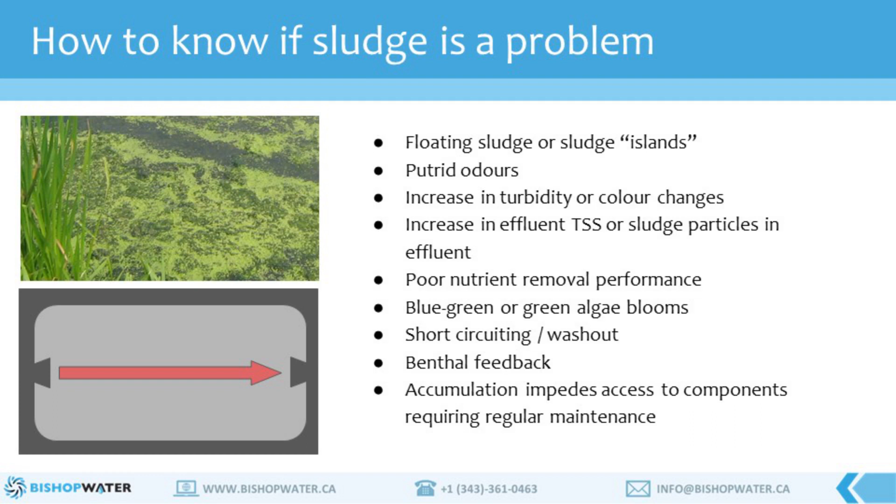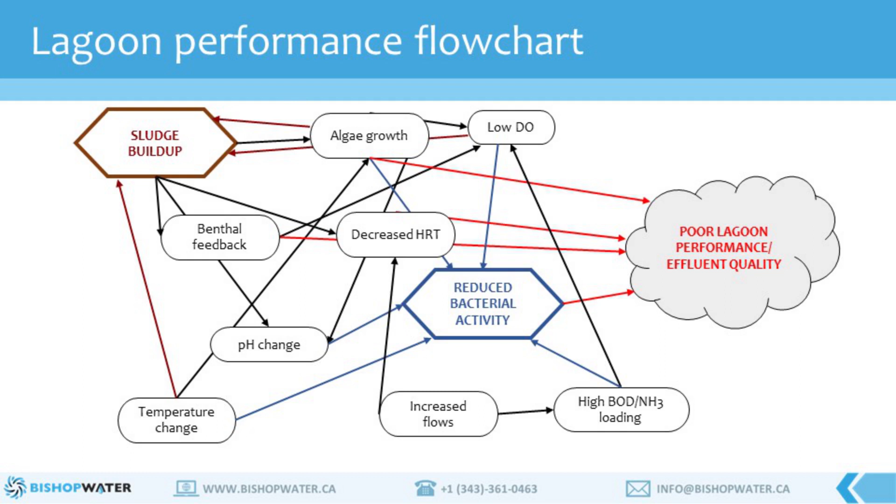Once excessive sludge is identified as the cause of a lagoon's operational issues, we can begin planning the desludging project. But before we go deeper into that process, I would like to start with a bit of a warning about some of the mishaps that can occur. One of the most important steps is knowing what the desludging project is supposed to achieve, because that helps determine how much sludge should be removed and from what areas of the lagoon. But without a clearly defined objective, it's difficult to scope the project and achieve measurable success.

Underestimating the sludge volume is also at the top of our list for things that we don't want to have happen. If this occurs and there's a lot more sludge in the lagoon than was estimated, it can add significant time, cost, and community disruption to a project.

Inadequate sludge sampling is also a situation that you don't want to find yourself in. The more samples we take, the better we understand the sludge characteristics throughout the sludge blanket. We also use these samples to do dewaterability testing and determine the best polymer for the lagoon. If the polymer or dose rate is suboptimal, then we can see slow dewatering and we may not get the best dewatering performance. That means more trucks will be needed to carry away wetter sludge, which increases costs.

Effluent quality can also be adversely affected. Too much polymer can leave a residual in the effluent, and too little may not sufficiently retain fine particles, leading to high TSS filtrate.

Great care should also be taken to understand the contaminants that are in the sludge, such as metals. These contaminants greatly influence the disposal or repurposing options for the sludge. It's best to know about these before the sludge comes out of the lagoon, so you can explore disposal options and ensure you have a plan and budget to carry out the disposal.

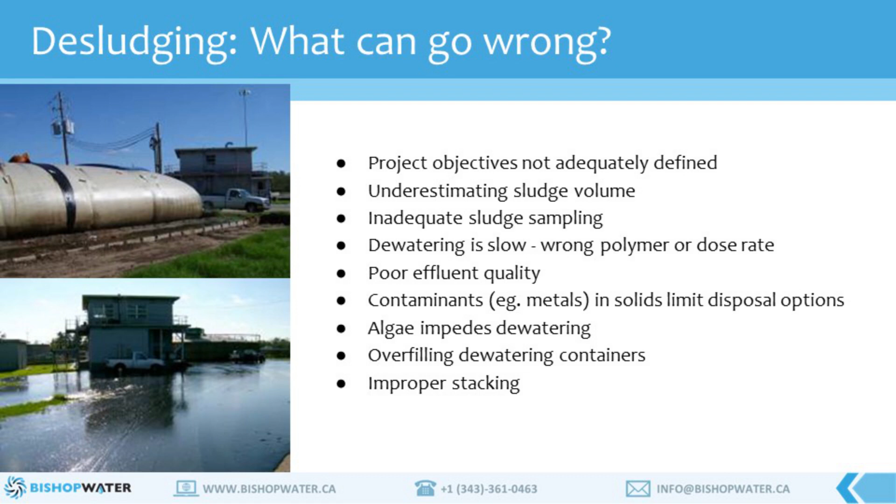Now we know what to watch out for, let's talk about how to do it right. Desludging begins with a comprehensive assessment of the lagoon or lagoons. Sludge usually accumulates unevenly in a lagoon, with heavier materials like grit settling near the inlet and lighter materials being dispersed farther and accumulating based on flow patterns, wind, and aeration.

The image on the top left is a sludge map of a lagoon showing high accumulations in the red area and moderate accumulations in the yellow. We take samples at predetermined points to estimate the sludge volume and the available treatment volume. The number of samples are based on the size of the lagoon and the sludge features. And of course, more sampling is better to understand the sludge profile and make good calculations.

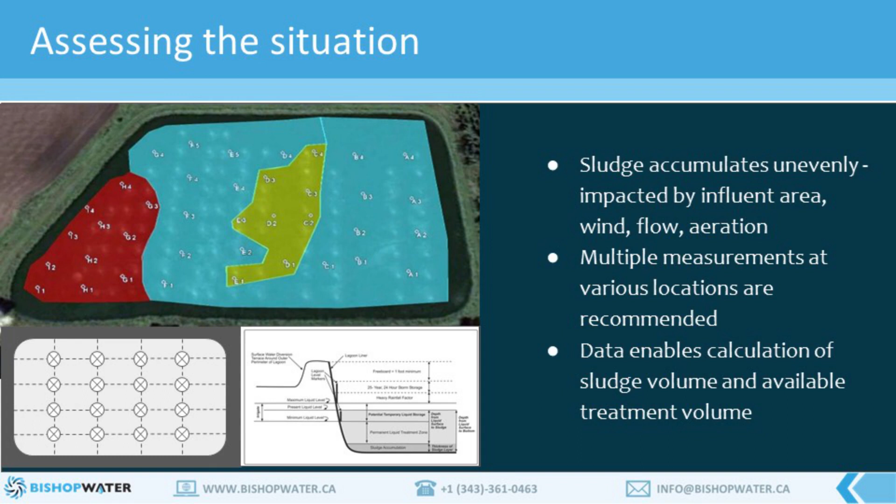There are several ways to measure sludge volume, ranging from very simple to very sophisticated. One of the easiest and most common ways to do it is with a sludge judge, shown top left. That's just a PVC pipe with a flap foot valve that the operator lowers down into the sludge layer from a boat. This is a good system because it takes depth measurement and a core sample at the same time. But once the solids concentration is above 5%, it becomes more difficult to push the tube down into the sludge.

A sludge gun is also a great system that can be used in combination with the sludge judge, shown bottom left. This electronic device uses infrared light to detect the sludge bed. The sensor is calibrated to ignore suspended solids and sounds a tone when it reaches a sludge of a certain density. The user reads marks on a string to determine the sludge depth.

And a third method that is commonly used is a bathymetric survey. This sonar mapping system is usually mounted on a small GPS-controlled boat that maps the entire lagoon in a grid pattern. It's the most accurate way to create a sludge map. The bottom right image shows the details we get from this technology.

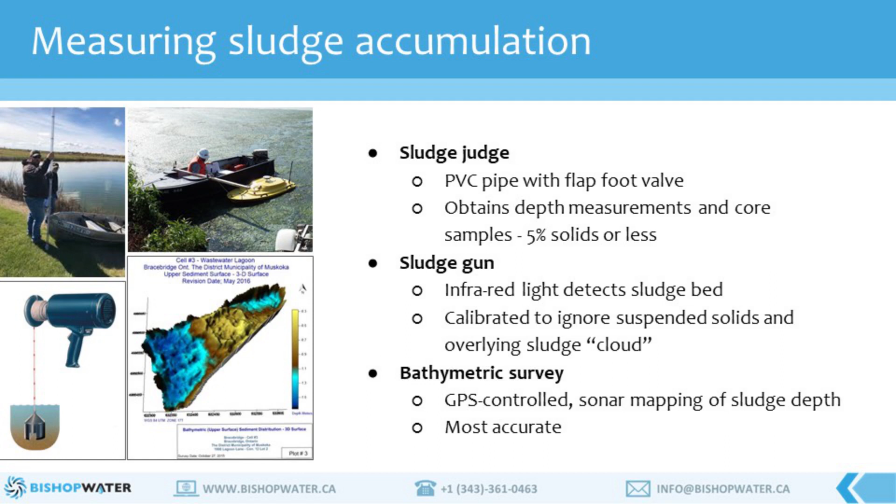It's also really important to have good as-built drawings of the lagoon. With those drawings, we can overlay the survey data with the lagoon profile to very accurately calculate the sludge depth and volume.

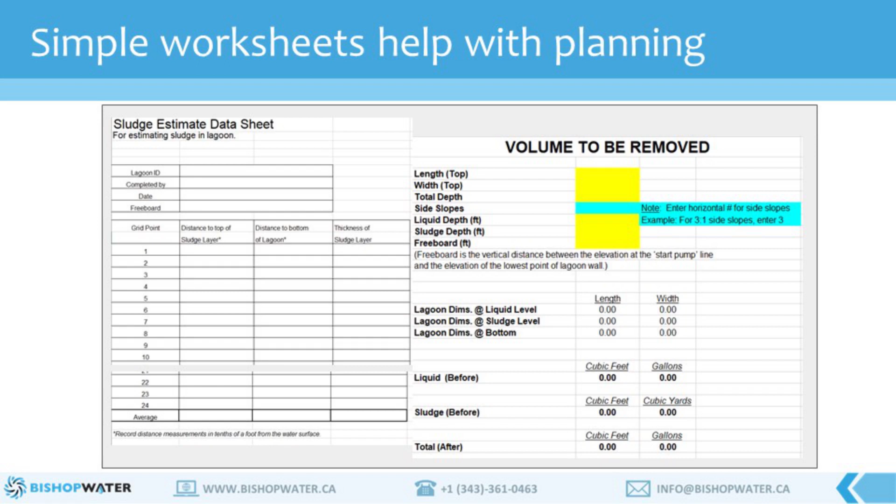This worksheet is an example of how data from the sludge judge or sludge gun would be recorded. This part isn't complicated, but it's only as good as the amount of data that is collected for it. The more data points we have, the better our sludge map and sludge estimate.

As we mentioned earlier, sludge samples are critical. They're often collected as the survey is being done. This is so important because sludge density or percent solids can vary considerably throughout the lagoon. Lagoons that have well-aged mature sludge and maybe haven't been cleaned for 20 years might have very dense sludge. The amount of grit and volatile organics can also influence density.

We've seen swings that range from 3 to 5% in one area of a lagoon to more than 40% in other areas. If you miss that dense area in your survey and don't account for it in the estimate of sludge volume, you will be surprised to see a lot more sludge coming out of the lagoon than you planned for.

When we do our testing, we ask for a 20-litre pail of sludge with samples that have been collected from multiple points in the lagoon. Large lagoons may require more than one pail. We combine the samples to create an average sludge mix and do our testing on that.

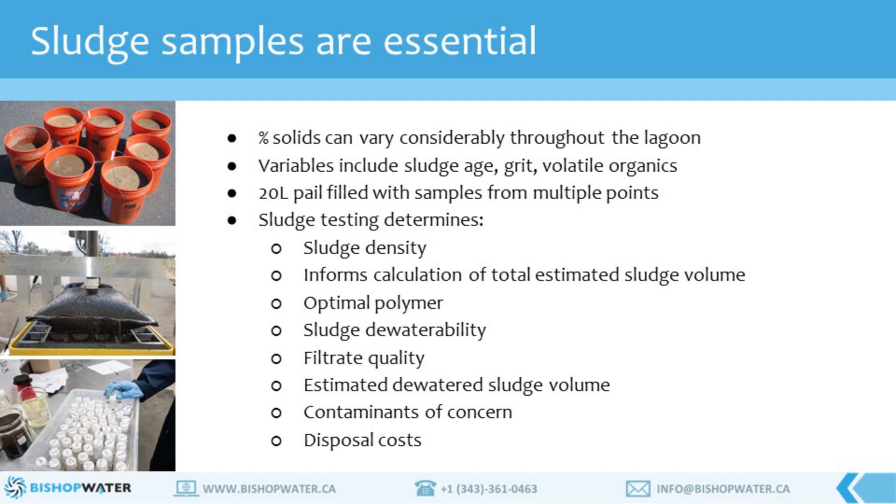With that sample and the sludge survey, we can now determine everything shown in the list: sludge density, total estimated sludge volume, optimal polymer, sludge dewaterability, filtrate quality, estimated dewatered sludge volume, contaminants of concern, and disposal costs.

Once we've determined how much sludge is in the lagoon, we can think about how much to take out. There are a number of factors that can be considered at this point. First, what is the purpose of the desludging project?

Many lagoon sites opt to do everything in one shot. Maybe it's been 15 or 20 years since the last desludging, and they just want to get it done and not worry about it until another 20 years goes by.

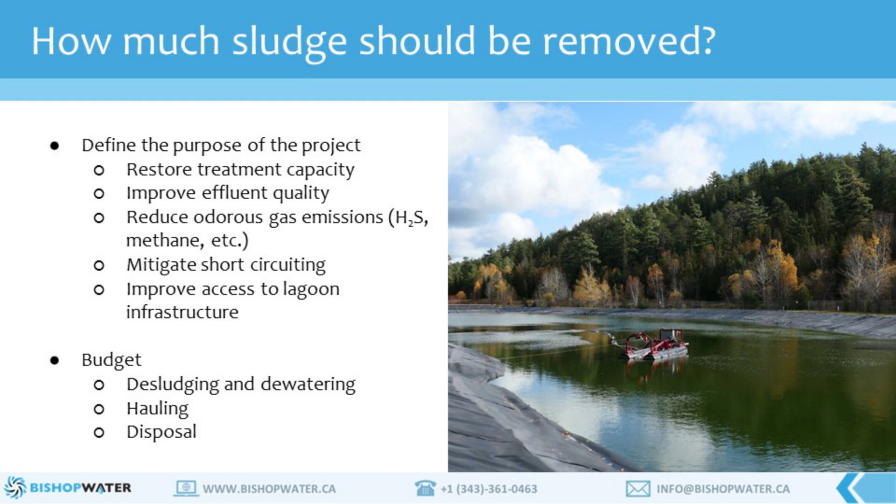But there's another option, which is a partial lagoon desludging. This can achieve some or all of the objectives shown on the last slide, and also provide some budgeting and operational flexibility. One of the biggest benefits is that it can defer the cost of a full lagoon cleanout over several years instead of a larger one-time expense.

We have performed several partial cleanouts with our Bishop Solids Management solution that is based on passive geotube dewatering. What we typically do is size the bags to provide 2 or 3 years of capacity so they can remain on site, continue dewatering, and enable the client to avoid hauling and disposal costs.

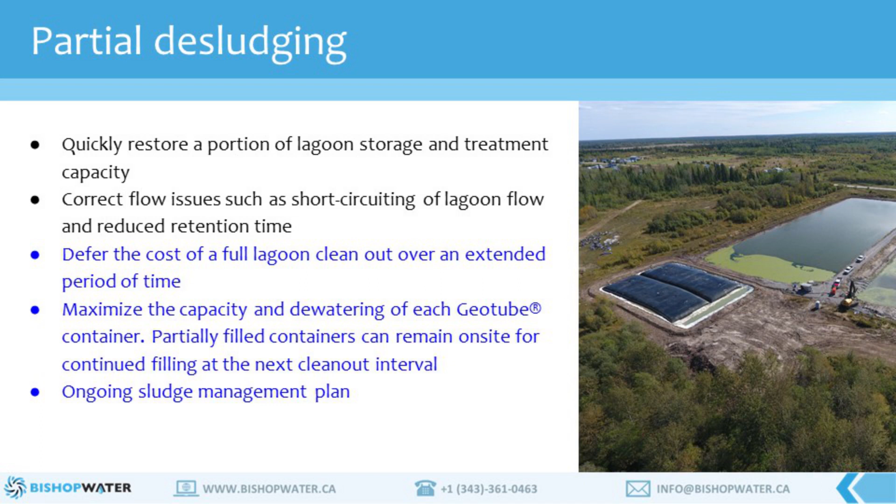We return to these sites on an annual basis to continue the cleanout and add materials to the geotubes. Another advantage is that the annual sludge management plan is continually restoring treatment capacity and reducing the risk of poor performance caused by sludge accumulation.

Here's an example of a partial lagoon cleanout project. In 2011, we removed about 250 bone-dry metric tons of sludge from lagoons near Cornwall, Ontario. These went into 4 large geotube containers that remained on the site.

In 2012 and 2013, we returned and continued pumping into those bags. Each time they were left at the site to continue dewatering. They also froze over the winter, which significantly enhances the dewatering process. The original geotubes are no longer at site, but we still go back to remove sludge as part of a maintenance strategy.

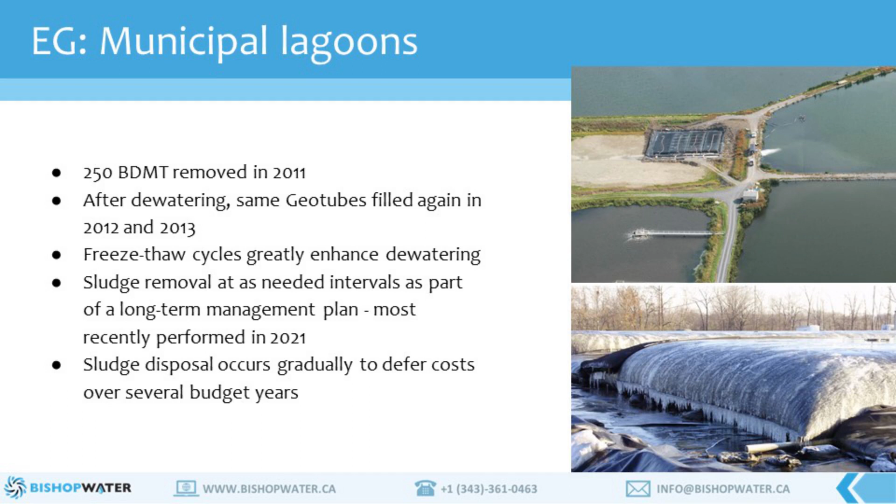Going back to our planning process, the next step is sludge removal from the lagoon. There are 2 options, each with distinctive cases and benefits.

First is a hydraulic dredge that uses an auger to gather sludge and pump it out of the lagoon. One big advantage of this is that the lagoon can often remain in operation while the dredging and desludging is done. The aeration equipment and other submerged equipment can remain in place, and there is little risk of damage to the liner. There are many types and sizes of dredges, even automated ones that use GPS controls to desludge the lagoon.

The second option is pushing the sludge with tracked equipment to a pump that is set up in the lagoon. This can be a more cost-effective approach for a total cleanout and offers greater efficiency since the sludge is visible and can be easily scraped up.

One downside, however, is the lagoon must be decommissioned and drained, and if it's an aerated lagoon, then the aeration equipment must also be removed. I should also mention that there is a risk of damage to lagoon liners with this method.

Some jurisdictions, such as Prince Edward Island, don't allow tracked equipment to enter a lagoon to ensure that no damage to the liner will occur. It's important to know if there are restrictions in your area when planning the project.

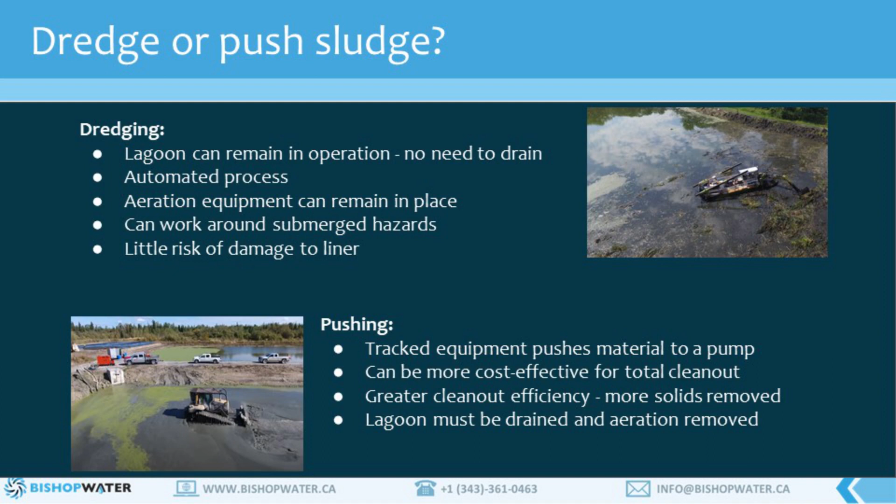There are a few options to consider for dewatering the sludge too. Sometimes sites choose not to dewater sludge, and we have seen projects where liquid sludge is immediately hauled away for land application. This method does rely heavily on trucking, and it can become costly, even more so if the land where the sludge is being applied isn't close by.

Let's quickly have a look at some other dewatering options. Mechanical options include centrifuges and belt presses. These can provide automated operation and can reduce sludge weight by 90% or more. There are many mobile options that are quite compact, which makes them ideal for sites with space constraints.

However, mechanical dewatering systems are quite energy intensive to operate and have a limited rate at which they can accept sludge, usually only a few hundred liters per minute. Dewatered solids are often collected in bins and hauled away regularly.

Another option is passive dewatering, such as our Bishop Solids Management solution, which we introduced when we talked about partial cleanouts. This is a gravity-based process that uses far less energy than mechanical systems. Since the solids are collected and contained in the geotube, it enables the solids to remain on site for an extended period. It does require more space than mechanical options, but the geotubes are customizable to fit the available space and can be stacked to further reduce the size of the dewatering cell. One other important advantage is that this process can accept solids as fast as they can be pumped, whether it's 2,000 or 10,000 liters per minute.

At this point, I'll turn the presentation over to Tyler.

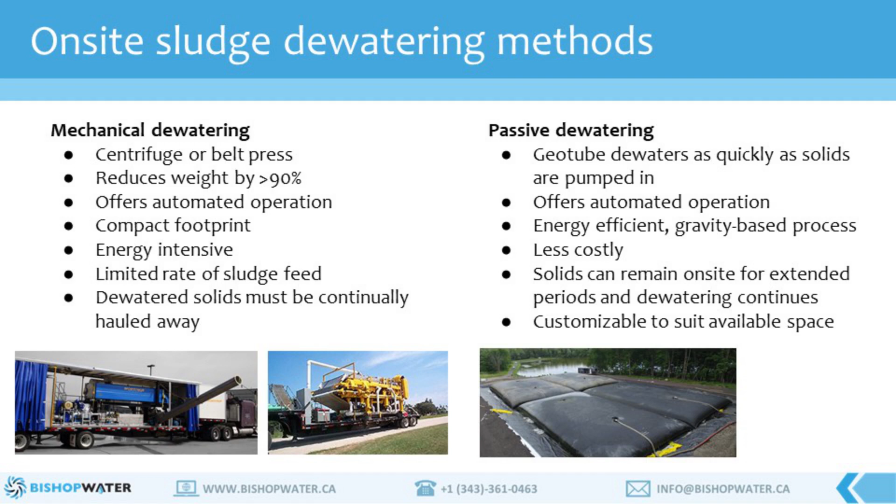Thanks, Kevin. Before we continue, I want to say a bit more about the Bishop Solids Management solution and its application for lagoon desludging. We've used this process for more than a decade at sites throughout Canada. It's a complete customizable solution that includes sludge removal, sludge conditioning, dewatering, and containment.

As Kevin said in the previous slide, it's very energy efficient with automated polymer dosing and flow controls that make it very easy to use. Unlike centrifuges and belt presses, our process incorporates very few moving parts, which makes it inherently reliable. We can achieve high levels of dry solids using only geotube filtration, specially selected dewatering polymers, and gravity.

Although we're talking about lagoon sludge today, this system is very effective for virtually any organic or granular slurry material, so it can be used for storm ponds, freshwater sediments, or mine tailings, to name a few other common applications. In addition to dewatering, optimized chemical conditioning also enables it to retain and reduce contaminants such as BOD, TSS, phosphorus, nitrogen, and metals, improving the quality of the filtrate.

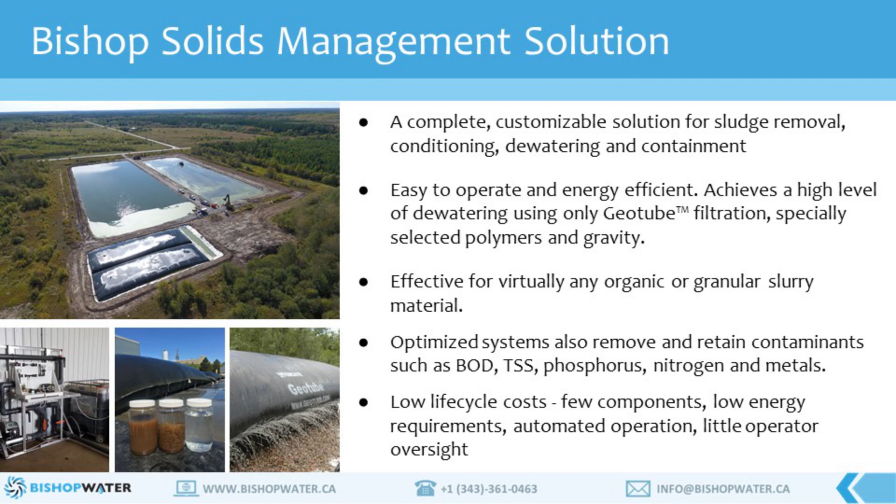Very quickly, here's how it works. Slurried solids are removed from the lagoon and pumped into the geotube. As they are pumped, our VPAS non-mechanical polymer system mixes and activates polymer in a single step, then injects it directly into the sludge feed line. Polymer accelerates dewatering and also helps retain fine particles and contaminants within the geotube.

Dewatering begins as soon as the solids enter the geotube, and we can immediately see a large volume of water permeating through the pores of the container. Once the bag is full or the desired amount of sludge has been processed, we disconnect the hoses and dewatering continues.

The longer the solids remain in the container, the more water is removed. The freeze-thaw cycle also enhances dewatering as frost creates void spaces in the material, allowing for better water movement. The bag can be cut open at any time after dewatering, and the solids can be removed for disposal or land applied if suitable. After several weeks or months of consolidation, the dewatered solids are more like soil than the sludge that was originally pumped in.

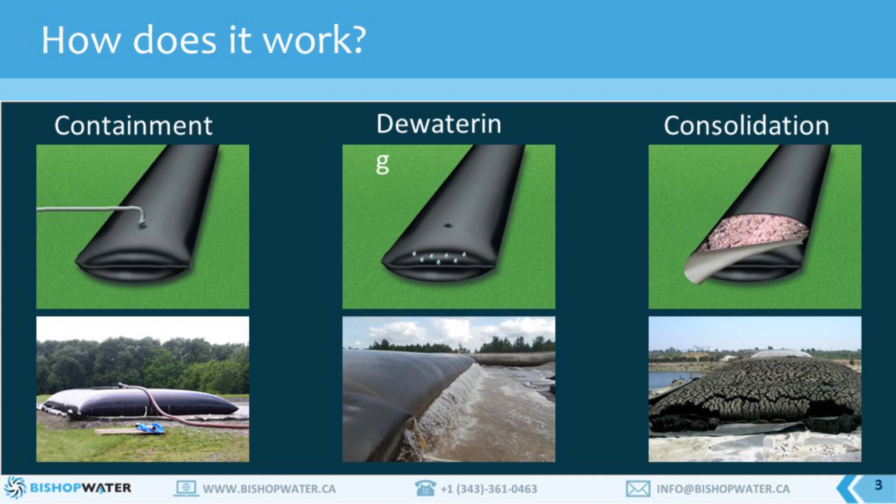We have received several industry awards for our work with this system. Our first was for a permanent system at the Greenway Wastewater Treatment Facility in London. The Bishop Solids Management Solution is used to collect incinerated sludge fly ash that was previously stored in an on-site lagoon. This process of containing and dewatering the solids completely eliminates the need for the lagoon and greatly reduces the hauling and disposal costs associated with removing the solids from the site.

The next project is at the Eganville Wastewater Treatment Plant, where our solids management solution is used to collect and dewater septage from local haulers. The biosolids are pumped directly into geotube containers, and the high-strength filtrate is directed to the adjacent wastewater treatment plant for treatment. Once dewatered and stabilized, the biosolids are used for land application.

Another award-winning project is in Perth, Ontario, where the system collects and dewaters process residuals from the town's water treatment plant. The filtrate from the geotube is of such high quality that it is discharged directly to the Tay River without any further treatment. The system also saved over $6 million in capital costs for the town, which was considering building a mechanical plant to deal with the solids.

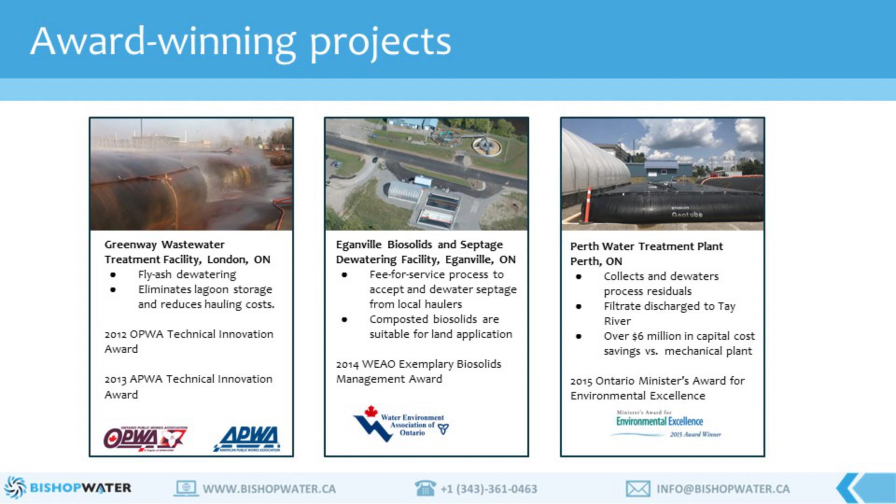Here are a few more examples of some challenging applications we've been involved with using our Bishop Solids Management Solution and geotube containers: permanent systems to handle waste sludge from municipal wastewater treatment plants, collection and dewatering of contaminated sediment and soils at industrial sites, dredging and dewatering of solids from stormwater ponds, collection and dewatering of excess soils at construction sites, on-site systems to collect, process waste, and treat wash water at agricultural sites, and shoreline systems to protect valuable coastal areas from erosion.

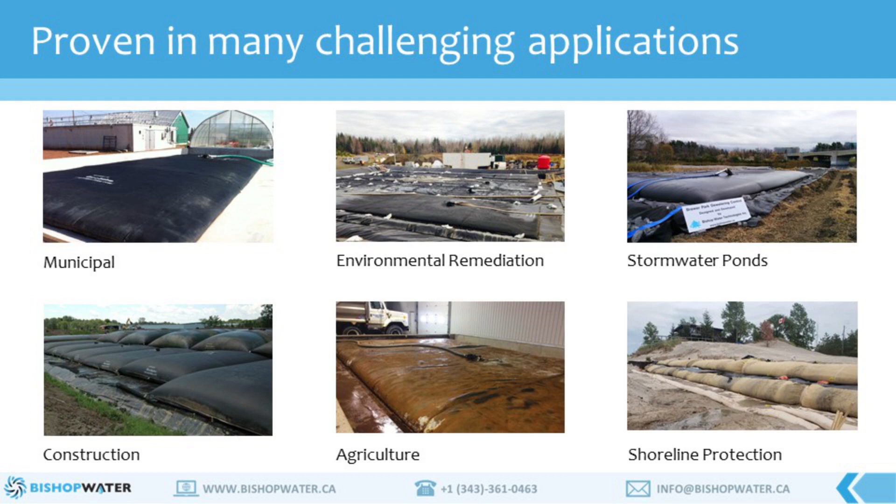Turning back to our lagoon desludging discussion, let's look at how we use the data from earlier steps to make some calculations. Our team uses customized electronic geotube planning tools that use input data such as sludge volume, solids content, pumping rates, and anticipated dewatering performance to accurately calculate the dewatered sludge volume and weight, the size and quantity of geotube containers, the required footprint of the laydown area, and the duration of the cleanout project. These tools are continually updated by TenCate, the geotube manufacturer, to refine the process and improve accuracy.

Regardless of which dewatering method you choose for your project, be sure the vendor can provide highly accurate estimates based on the data you've collected in earlier stages, and that they leverage their operational experience with their process. Don't accept ballpark estimates or ranges of potential outcomes, because errors can set off a cascade of problems that add considerable time and cost to the project.

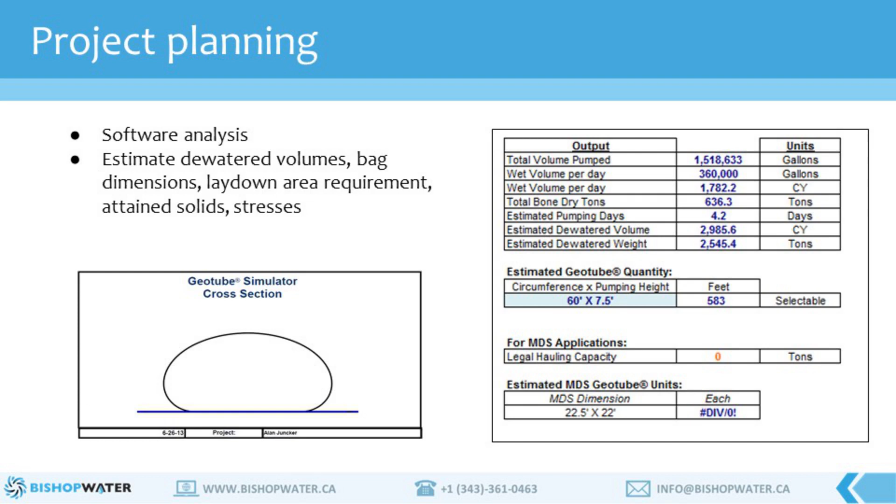Here are a few other important considerations as you prepare for the desludging project. Experience plays a critical role in identifying these planning considerations and determining the best methods for the site setup. Is there sufficient space for equipment and a dewatering pad within appropriate proximity to the lagoons? How will the piping, hoses, and valves be laid out at the site?

Where will chemical injection and sampling points be located? Where will the filtrate go? This is especially important if your lagoon will be shut down. If there's a second lagoon, it could go there, but what if there isn't a second lagoon cell? A temporary secondary treatment containment process may be needed.

It's also possible that filtrate might be good enough to be discharged to a receiving body, but in either case, effluent monitoring will be required to ensure discharge compliance. Keep in mind that even if your filtrate is going back into a lagoon, it may be necessary to track volumes and monitor the filtrate quality.

Schedule your cleanout when nothing else is happening that could be disruptive. This includes other maintenance or construction activities at the plant or lagoon site, and events that could cause large inflows into the plant—things like local industries that increase discharge at certain times of year, community events, or seasonal periods with higher precipitation.

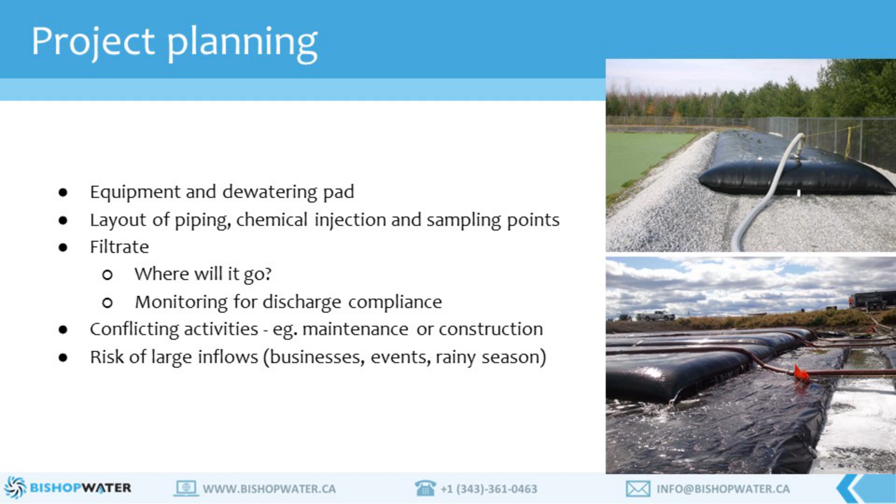Finally, we need to think about what will happen to the sludge that's been removed. Depending on how the sludge is stored at the site, local regulations may dictate how long solids can remain at the site once removed from the lagoon.

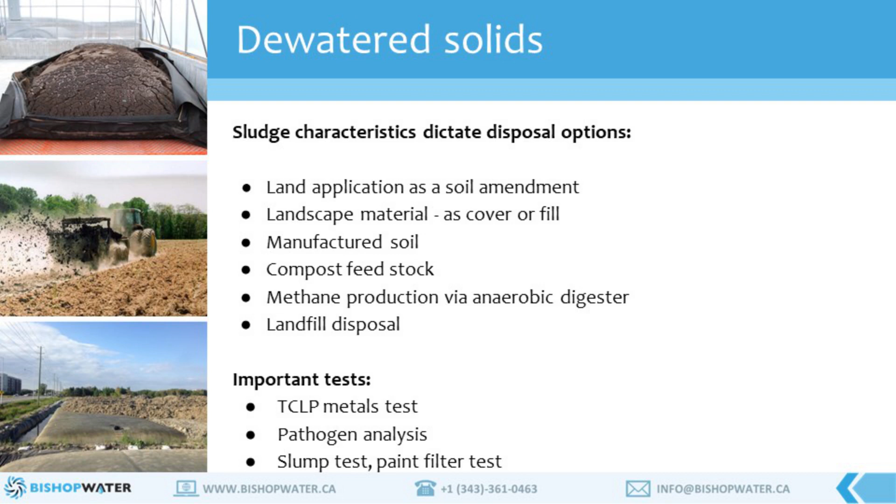There are a number of options for the sludge, including land application, landscape material, landfill disposal, or others. The fate depends on the classification of your sludge into categories set out regionally through applicable regulations, such as Class A, Class B, hazardous material. These classifications are determined by results of analytical testing, and the criteria to compare against can vary by region. We regularly encounter TCLP metals testing, pathogen analysis, and slump testing.

As we saw at the beginning of this presentation, sludge collection and dewatering isn't a DIY job, so some specialized and experienced help is required. There are at least a couple of ways to think about how to structure your project for procurement. One way is to break it up into two parts.

The first part can focus on information gathering, and a company can be hired to do all the sludge measurement, testing, and calculations. Once that information is in hand, it can be used to develop a comprehensive scope of work for the desludging project, and an RFP can be passed on to the service providers for a competitive or sole source procurement.

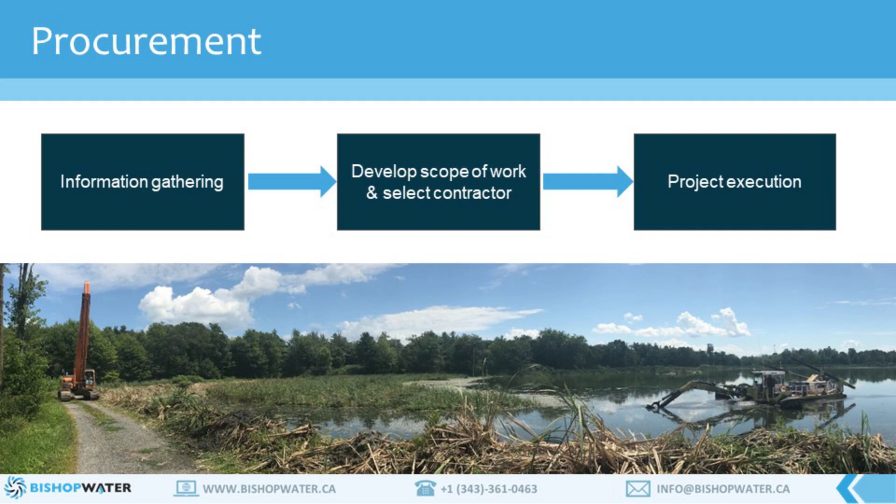The other option is to hire a single company to do everything, perhaps under a consulting arrangement where they handle all aspects of the project. The project lead might use their own resources or hire subcontractors to handle various aspects of the project, but whatever they choose to do, the client deals with a single point of accountability.

To develop the specification for a lagoon cleanout project, reference all of the steps and objectives we've talked about in this webinar. The specification should include a clear breakdown of each of those at each stage of the project. Some of the most important points to include are the volume of sludge that needs to be removed, the solids content of the in situ sludge and dewatered sludge, specific details about the materials and equipment that will be used for the project, and how the dewatered sludge and filtrate will be managed.

Of course, we all know that some of this information can't be accurately determined unless comprehensive testing has been done. So if one company is hired to do everything, they should present their plan and methodology for information gathering as well as the desludging. But if the procurement is broken up into two parts, two specifications will be needed: one for the information gathering stage and one for the sludge removal and dewatering.

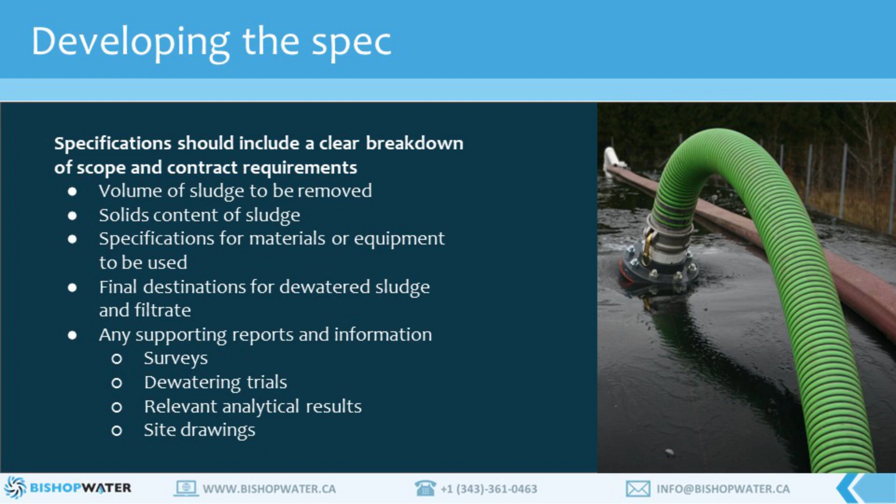Whether there are one or two components to the project, as much supporting information as is available should also be provided. That can include things like previous surveys, dewatering trials, analytical results, and site drawings.

Once an RFP is issued, vendors will have access to the specification and supporting documents. But for some, that won't be enough, and they'll want to contact you to ask questions and gather more information. Collecting that information takes time, so make sure sufficient time has been allocated for potential partners to visit the site and conduct the tests needed to make good project estimates.

You should also be prepared to provide information such as site drawings and utilities like piping, aeration, and electricity. Aeration systems and other obstacles on land or in the lagoon also have a big impact on how desludging is approached.

So be ready to talk about your plans for those infrastructure assets and how they can be worked around. Management of the filtrate and dewatered sludge are also big parts of a desludging project and need to be addressed in the proposal. Vendors should be able to provide options for these steps and either incorporate them into their proposal or recommend others for those aspects.

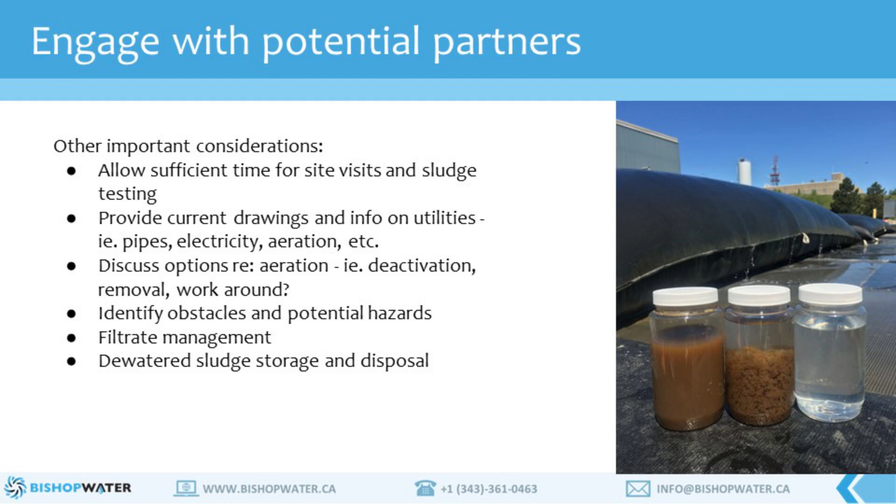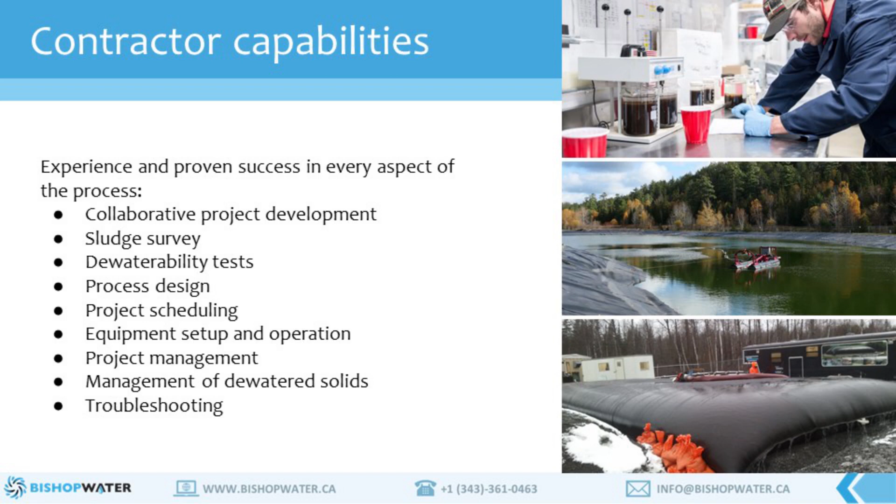To confidently select a service provider, they should be able to demonstrate experience and proven success in each of these categories, develop specific plans for your project, and execute each deliverable safely and competently.

You should also look for contractors that offer a process capable of meeting permitting requirements. For example, the Bishop Solids Management Solution has a mobile environmental compliance approval for Ontario for the use of geotubes and polymers. This means our customers don't have to obtain permits or alter the ECA of their plant to use our desludging services.

Other attributes that will help your project go smoothly include a vendor that has a mobile system with a self-contained generator that can be brought to site and quickly set up. An automated polymer injection system is also a big advantage.

A good one will take frequent readings, about every 15 seconds, and automatically adjust the polymer dosing based on the sludge flow rate and sludge concentration. This ensures polymer dosing is precisely controlled to optimize dewatering, avoid residual polymer in effluent, and keep polymer costs in line with estimates.

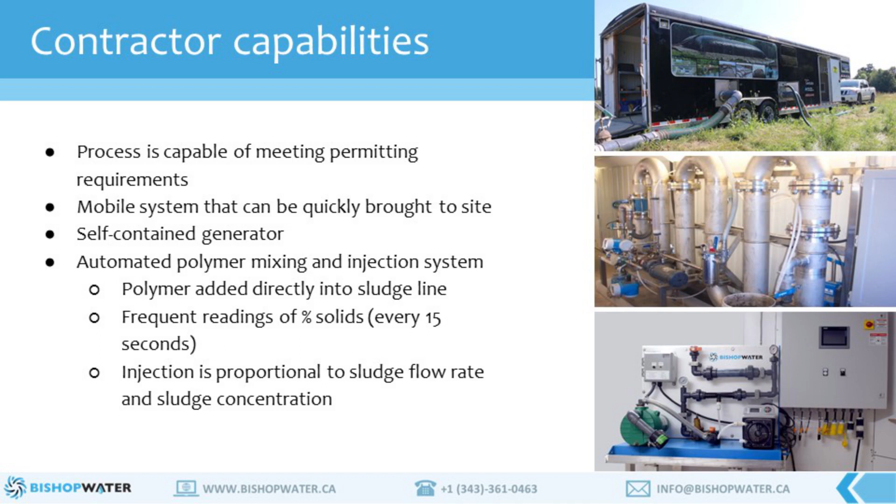A good desludging contractor will be highly accountable for their performance and meeting the terms of your contract. Be sure that your contractor will provide regular reports on the volume of material they've processed, the average percent solids of the material processed, and the test results of filtrate water quality. This data can be presented at regular intervals or collected over the course of the project and provided upon completion.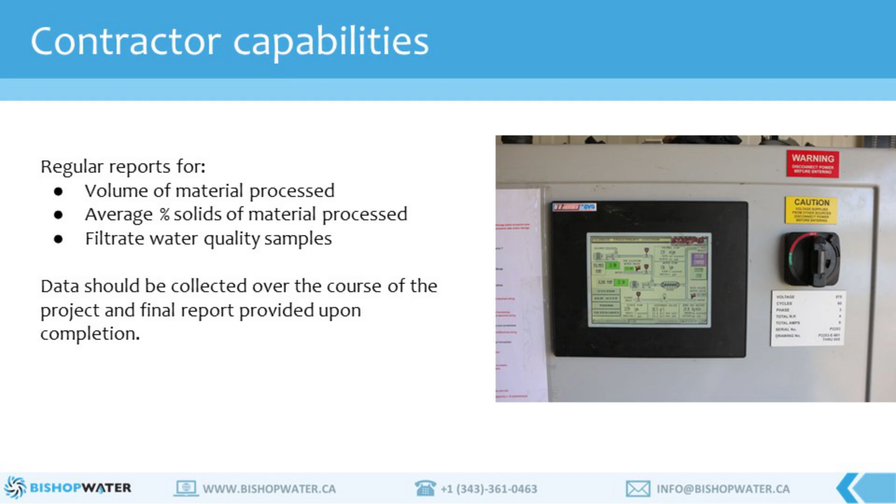To finish up this part of the webinar, here's an example of a lagoon sludge cleanout that our team recently completed at the O'Leary Wastewater Treatment Facility in Prince Edward Island. A couple of years ago, the two-cell lagoon began experiencing serious blooms of blue-green algae and exceedances of TSS, BOD, and coliform bacteria in treated effluent.

Hydrogen sulfide gas was also accumulating in a below-grade chamber and caused serious corrosion to ductile iron pipes, an electrical panel, and a UV system. The town began with a sludge survey done by the local WSP team. The results showed that despite the large area of the lagoons, they are relatively shallow and had accumulated a lot of sludge, which was impeding their ability to remove nutrients and settle solids.

Bishop Water was selected to perform the sludge removal and dewatering of both cells with their solids management system. After completing our sludge calculations, we built a dewatering area that would accommodate 3 geotube units across the bottom and 2 more stacked on top. This helped reduce the footprint and cost of the dewatering area.

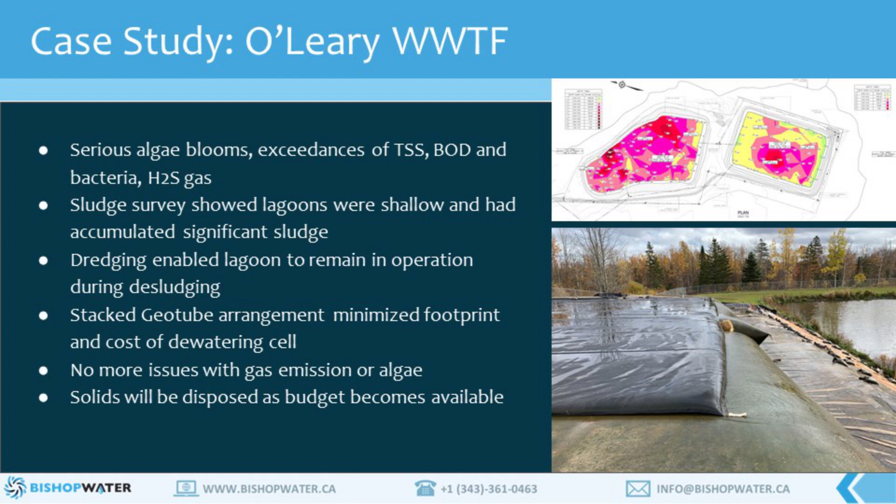We completed the project in about 5 weeks and removed about 872 bone-dry tons of sludge. Since then, there have been no issues with algae, gas emissions, or effluent quality. The on-site storage and consolidation that the geotubes provide also enables the town to spread the cost of disposal over several years. Aside from the budgetary benefits, the material will continue dewatering and experience freeze-thaw over the winter, which also helps expel more water. We estimate that the material could achieve 40% dry solids over time.

To close the presentation, I'd also like to introduce a couple of our other simple low-energy solutions that can also be applied to lagoons to enhance nutrient removal.

First is Bishop BioCord reactors. BioCord is like a condominium for bacteria that creates the ideal home on which bacteria can thrive. This attached growth process can be installed directly into a lagoon cell to improve cold weather nitrification and help the lagoon handle high strength or variable loading events. It's scalable, so we can install the right amount to handle current needs and easily add more if loading increases.

BioCord is equipped with a unique aeration system that relies on compressors rather than blowers, which helps reduce energy costs. Overall, a BioCord system can offer capital and operating costs that are up to 50% lower than alternatives such as MBBR.

I'd also like to introduce you to ClariPhos, a coagulant technology that's made with rare earth elements, cerium and lanthanum. ClariPhos performs significantly better than alum or ferric-based coagulants for phosphorus reduction because it forms a denser, more stable precipitate that settles out about twice as fast.

That enables treatment plants to achieve ultra-low phosphorus levels without the need for costly tertiary filtration systems. ClariPhos also works at a much lower dose than alternatives, which means far less sludge is produced, up to 50% less. And of the sludge that is produced, it dewaters up to 40% better than alum or ferric sludge, leaving a lower volume to manage.

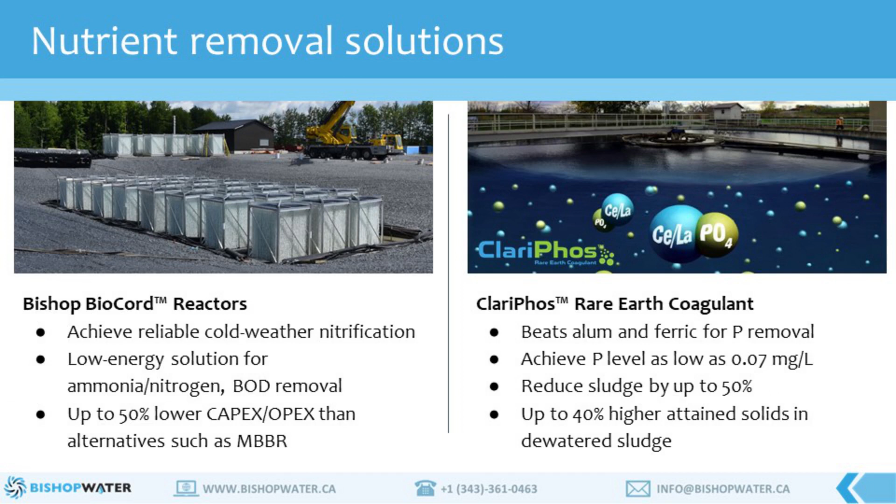Geotube containers can be installed as part of an ongoing sludge management strategy, and they can also be used to accept septage, eliminating the need to put that high-strength waste directly into the lagoon. BioCord, as we've just learned, is installed directly into a lagoon cell and can be easily expanded if greater nutrient removal is required at a later point.

ClariPhos can be dosed as the sludge is being pumped into the geotube, or it can also be added to effluent in a polishing lagoon to precipitate phosphorus.

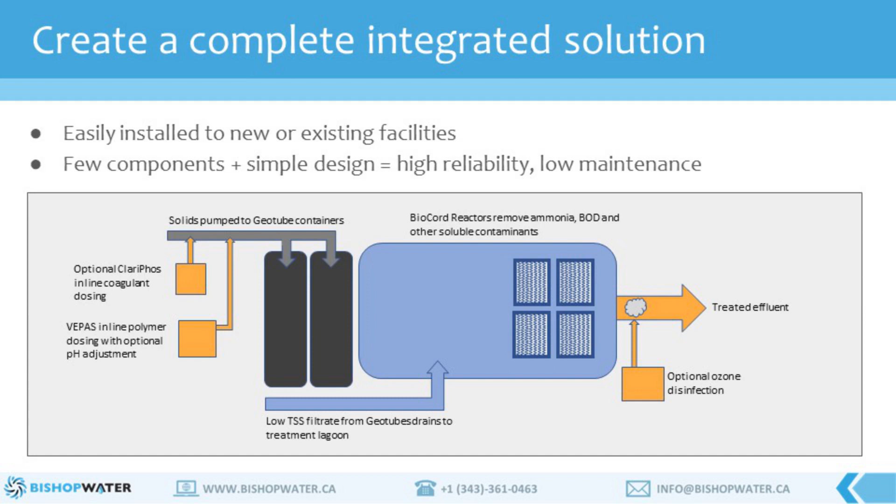Regardless of what type of project we work on and which of our systems are deployed to the site, delivering excellent customer service is our top priority. That starts right from the beginning with thoughtful and informative assessments, followed by careful consultation to develop the scope and deliverables for each project.

Many of the components of our system are manufactured in Canada, and our team continually evaluates and improves operational processes so that we can maximize performance and value. We do everything that we can to ensure that projects are delivered on time, on budget, and with the highest standards for safety, performance, and responsiveness.

We have a knowledgeable and highly experienced team that is ready to assist with all aspects of planning and delivery of lagoon cleanout or upgrade projects anywhere in Canada.